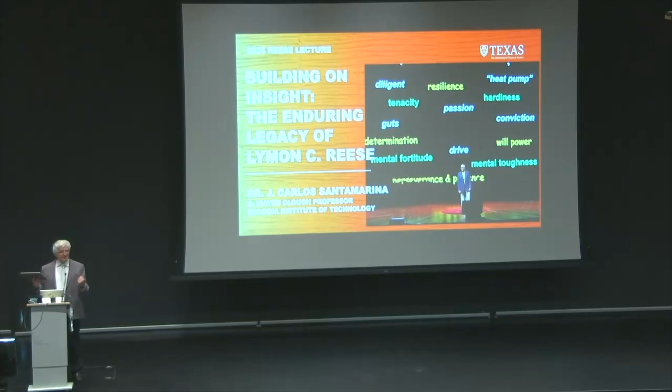I think his thesis was something like, some individuals excel so much with their grit, which, by the way, is not an easy term to translate. It's perseverance, but perseverance in the face of adversity. So it's a quite unique term. But his thesis was that some people have such exceptional grit that by sharing it with others, they catalyze the grit in the people who work with them.

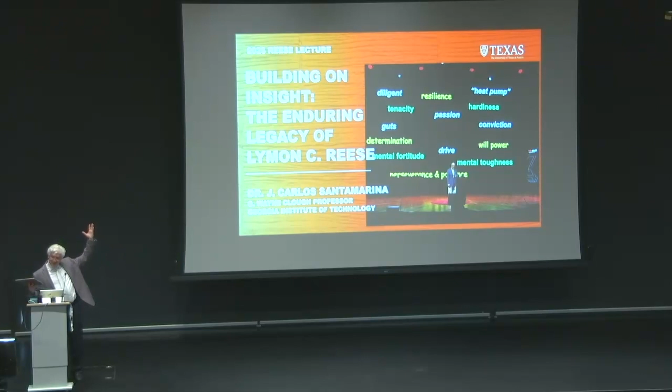And Professor Santamarina has touched so many people, including some people down there in 1984, back in the days in Cordoba. So it is wonderful that we will have now the opportunity to talk about the grit of Professor Santamarina, but with another person who has particularly exceptional grit, Dr. Lymon Reese. Carlos.

I have never had such a generous introduction. Sincerely, thank you so much. I'm very grateful, but I'm also, it's an honor to be here. I'm so touched by the opportunity to be here sharing this afternoon with you.

You know, I have come to realize that technical fields don't fade, don't die because we run out of fun questions. They fade because we stop asking questions that are relevant to society. And so from that point of view, Lymon Reese really addressed important questions, and he answered them, and he moved our field forward.

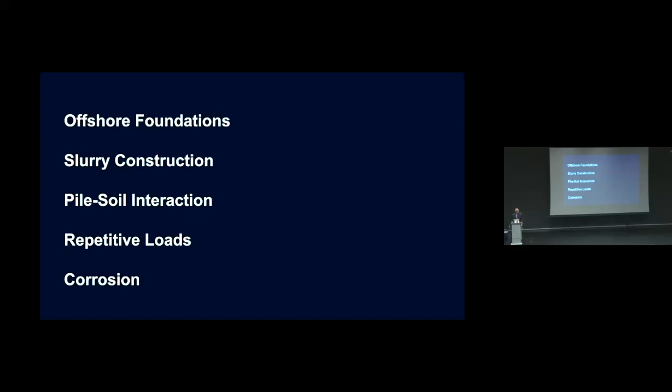So these are the contents. I will say something about offshore foundations, slurry construction that he really mastered, pile-soil interaction, repetitive loads, and I will say something about corrosion towards the end. So this is the first one, the offshore foundations.

This is really a seminal paper, his 1961 paper at the International Conference in Paris. Please take a look at that paper, it's really a wonderful one. There were simple solutions for the case where stiffness was constant with depth, but he recognized that was really not realistic. So he generalized the solution for cases where that was not the case, but he needed to use computers, and so he did.

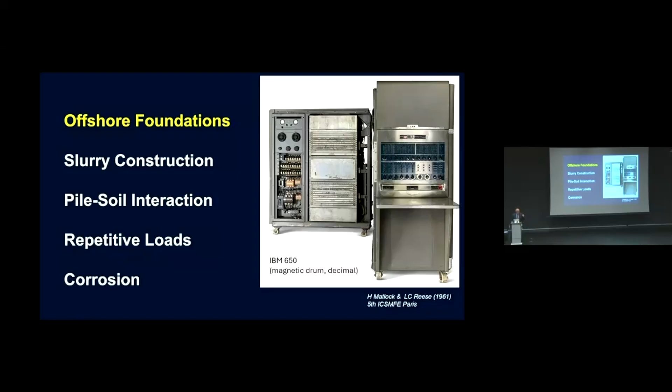He used this one, an IBM 650. It was a magnetic drum spinning at very high speed, and it had decimal notation — I think that was probably the only computer ever built like that. And that is the one he used. Because we didn't have access to those computers, he created all these nomograms, etc., that in industry are still being very useful.

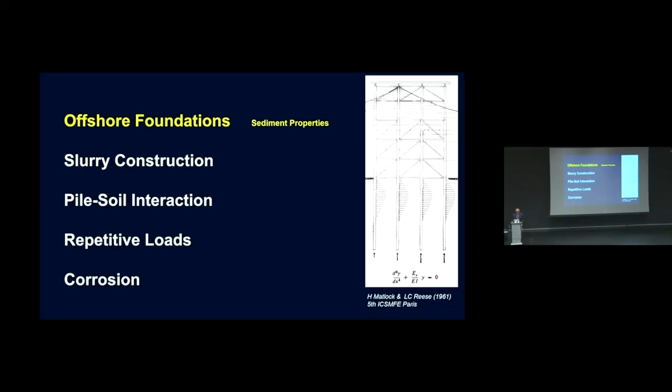I will take just a small topic in the offshore foundations, and I will talk about sediment properties. Coastal geotech is really a frontier for us in our community. Look, folks, 30%, 40% of the US population is in coastal areas. And by the way, that percentage is pretty much the same around the world.

Coastal is really a challenging space, and it's going to become more challenging with sea level rise and saltwater intrusion, etc. Imagine the cost to New Orleans, to Miami, to South Texas, to New York. I see Ed here, and he knows that firsthand. This will be huge in the years to come. We are talking about 30 more centimeters by 2050, and by the end of the century, probably a meter, plus or minus 20 centimeters.

These are big numbers. And the number of people that will be affected — Katrina was a 30-foot, 10-meter surge.

It's not the wind that caused the damage in Katrina. It was the water advancing and floating all the casinos offshore, making them come onshore.

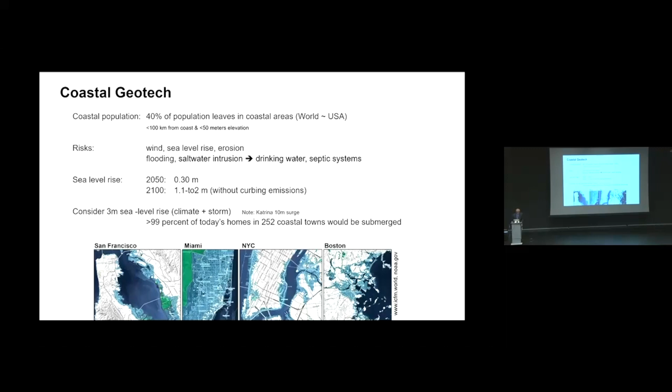But even with a much lower situation, with a sea level rise combined with a climate event of 3 meters, 10 feet, 99% of today's homes in 252 coastal towns will be submerged in the US. The cost of this will be dramatic, so we have to ask, what are the properties that we need?

And I like soil behavior, so that is where I'm hanging myself from Lymon Reese at this point.

But many of the sediments that reach the coastal areas and the offshore are indeed transported, like we have seen onshore. Look at the wind dust coming on the Red Sea, or the volcano blowing up in southern Chile, going all the way across Patagonia in Argentina, or the Amazon River forming a wonderful delta. These are terrigenous sediments that get transported and deposited.

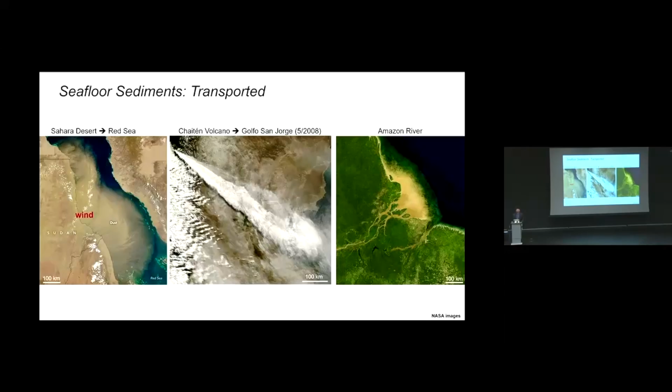But offshore, there are some unique formations that are interesting to recognize. First of all, there is lots of bioactivity: the diatoms, the foraminifera, and all the shells and the formation of the carbonates. These are going to give unique properties to our offshore materials.

And here is Billy, who was working on the sediments offshore North Carolina. And you think of Ariake clays in Japan and around the world. These are going to be very unique materials. Foraminifera and diatoms are the culprit in that case.

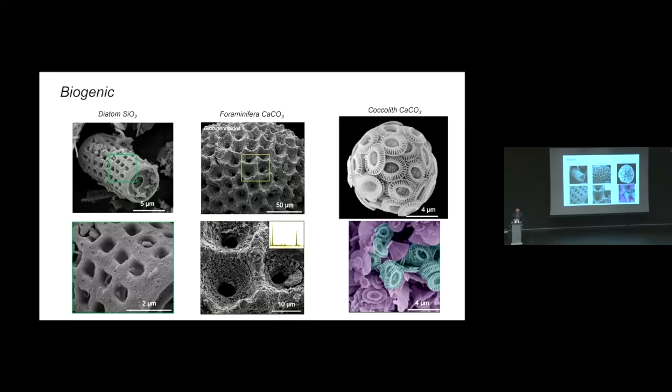But look at this one. Here we have the Gulf beginning to open, let's say 300 to 400 million years ago. Until that point, big deposits of salt had formed. But the salt is not pure salt, it's not like in the Great Salt Lake.

As it advances, this becomes a self-armoring layer, and it takes longer and longer for diffusion to take place. But all the salts that form the diapirs, etc., that trap the oil beneath or within in the Gulf of Mexico, this is the origin. These are unique sediments that you're going to encounter beneath the Mississippi sediments.

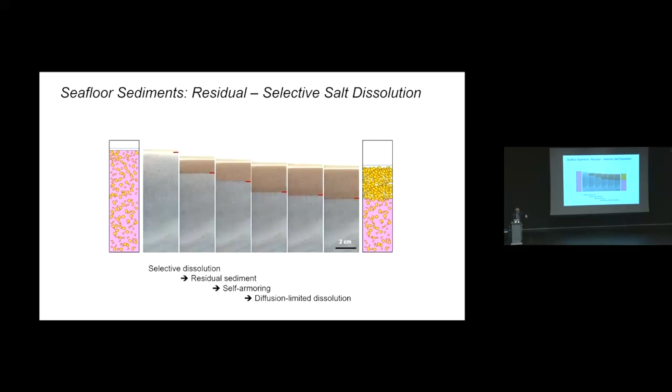Now, in many cases there are hydrothermal vents, and now we are talking about supercritical water if you're in the deep geothermal. Supercritical water has the ability to dissolve the silts and the silicas, and then they come and precipitate in the water column. The weirdest sediments begin forming. And if you thought that Mexico City soils are weird, these are an order of magnitude weirder, with properties that are really out of scale.

But regardless of the formation history, we need to recognize that if we're going to move into the offshore coastal regions, some of the things we have learned in our community throughout the last century still remain. Grain size distribution is critical. The partition between coarse and fines is critical. Please don't use the words cohesive and cohesionless, that's sinful. So the distinction between coarse and fine, that is critical.

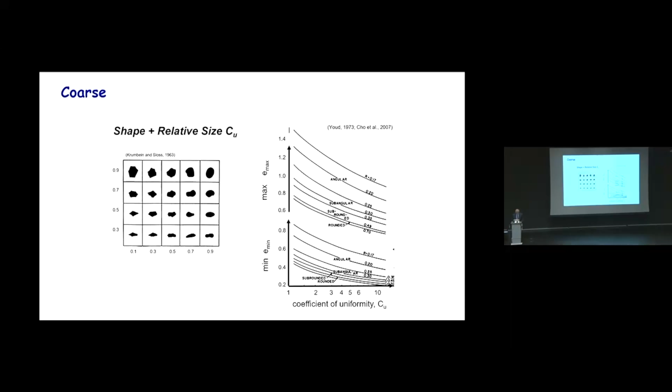For the coarse material, it's about grain size distribution and particle shape. For the fines, it's all about how it reacts with the pore fluids. What happens if there is a brine front, or a low concentration front, and saltwater intrusion? If you run three liquid limits, with brine, with deionized water, and with kerosene or decane, you will gain an amazing amount of information about the behavior of the fines. It could also affect things if you have a sewer leakage, etc. This is a very good way to test it.

By the time you bring them all together, it's all about whether there are enough fines to fill in the voids in the coarse material, and whether it will be coarse-controlled, with the fines plugging the holes while the skeleton remains coarse-controlled. I think this is a very smart pointer. Let me see.

In this case, the fines are plugging the holes. Stiffness and strength are controlled by the coarse, but the fines are controlling permeability. It's changed six orders of magnitude by now. And by then, the coarse are beginning to float in the fines, and it becomes fines controlled.

This is the essence of soil classification. There are a few upgrades to the unified soil classification—please take a look. We're doing much better today, 100 years, or 60 years after Casagrande, 80 years after Casagrande.

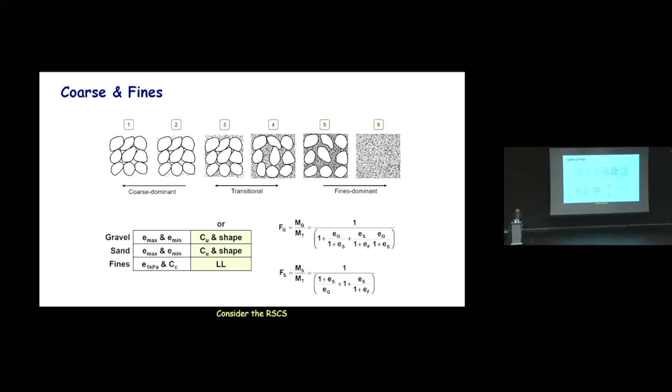Now something interesting happens when it's offshore. The sediments form, and there's no capillary action—everything is about burial and self-weight. So the question is, how loose could they pack? If it's a sand, it's going to be somewhere between Emax and Emin. But as it gets finer and finer, the void ratio gets very large.

Those hydrothermal precipitates I was talking about have a void ratio approaching 100, and they are stable—99% of it is water. It's not too far away from Mexico City, where it's 90% water, but in this case 99%, and they are stable. We totally miss them when we put in a piston sampler—it just goes through, so that's not a way to study them.

So this is what we call the asymptotic void ratio at zero effective stress. It does exist—there is an asymptote. Now I can use those asymptotic void ratios to estimate the pore size distribution and see, if there was an interface and it gets drying, how much suction it could mobilize.

For a sand, not too much—that's 4 centimeters of water head. But as you go into finer materials, like a kaolin, somewhere around 10 meters squared per gram, you're already at 200 kilopascals, which is 20 meters of water in terms of suction. So that soil is beginning to get squeezed.

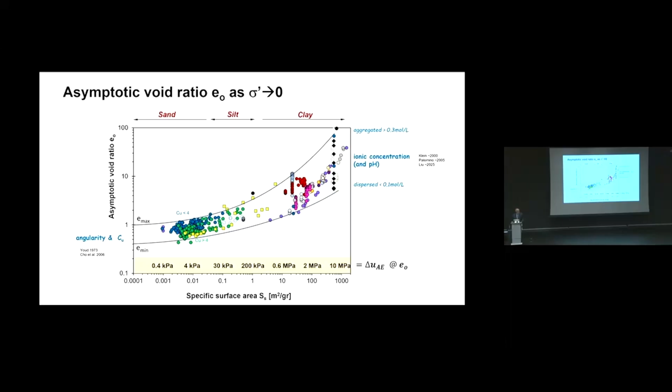But there are normally consolidated soils offshore. Of course, diagenesis kicks in. So now that we recognize there's no suction, what is the evolution of self-burial, the evolution of effective stress? As it begins piling up on top of each other, it squeezes the lower layers. So how does effective stress, stiffness, shear wave velocity evolve?

I put a few slides here for Ken's talk. It's a pity that he isn't here, but we'll send it to him.

There's very little mathematics here, but the increase in effective stress across a layer is the weight of that layer—the buoyant weight of that layer—which is related to the void ratio, and the void ratio is related to the effective stress. A classical differential equation. But to solve it, we need to know how the void ratio changes with effective stress.

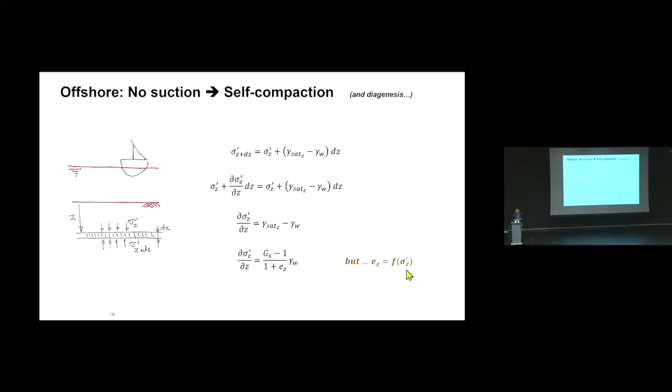And my goodness, we've been using Terzaghi too much. Nothing is linear—it's just linear in a narrow range. You can fit a linear thing to anything, right? But it's not. This is the true behavior of soils, folks. It's an exponential decay—it looks almost like Boyle and Mariotte's law when you squeeze a gas. We're just squeezing particles, but that's the true behavior.

Of course, when you put it in semi-log scale, it looks different, and then we begin fitting with one line, two lines, three lines for unloading. But that's not real—this is real, and this is more or less the true behavior of a soil. If it has some cementation, it changes a little, but the effect isn't so pronounced. This is the true behavior.

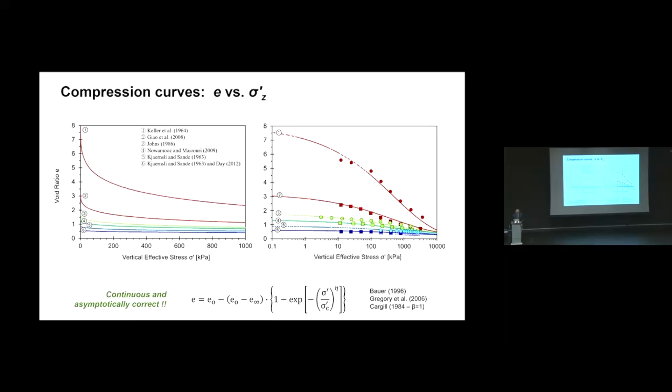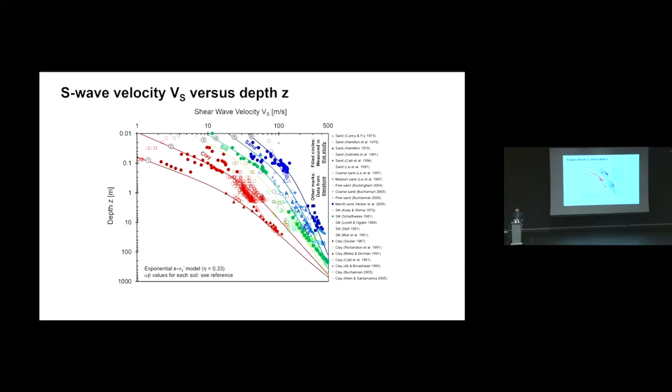And if I know the shear wave velocity, and I know the bulk modulus of water, then this is a simple equation, it's called Biot-Gassmann. I can predict the P wave velocity, and I get the P wave velocities quite well, which means something very interesting.

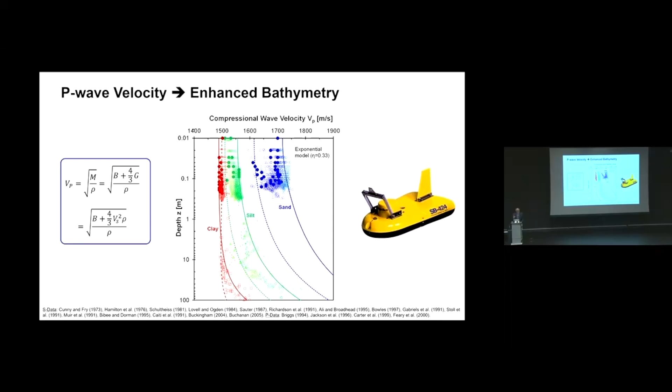Now I can take a sub-bottom profiler, or I can analyze marine seismics, and from the data I can begin predicting what soil types I have. And then from there, you move through the whole sequence of events. So it's a very powerful way of characterizing our offshore sediments.

Now, the story, as we move forward, will need the hydraulic conductivity, so I'm going to say something about hydraulic conductivity. At the beginning, I said void ratio is quite irrelevant - that is a very bad thought. It is a secondary parameter, or porosity, but it is an important one.

This is sand, high permeability, low range in void ratios, but as we move into the silts and clays, this is a bentonite, we see that the permeability is quite related to porosity. And if I look at the intersection at void ratio 1, that permeability is directly related to the specific surface.

Specific surface is a very good parameter to measure, and it's very easy. So if you ever order somebody to do a liquid limit, you have to request that they do a specific surface too, because it's very informative. And so now we know how compressibility works, how permeability evolves, and we will be able to do a few things.

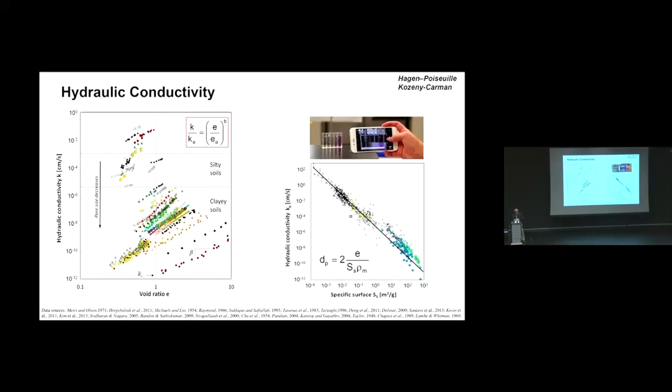But this is, once again, going back to Ken Stokoe: it is great to recover sediments and to measure the velocity, but the problem is that recovering sediments is quite a tortuous experience for the sediment. All the state of stress gets released, altered.

And if you are offshore, when there is high pressure in the water, gases are in solution, and when you bring them up, it's like opening a Coca-Cola can - all the bubbles come out. And now you have chocolate mousse, you don't have a sediment anymore. So what can you infer from that? That gets very tricky.

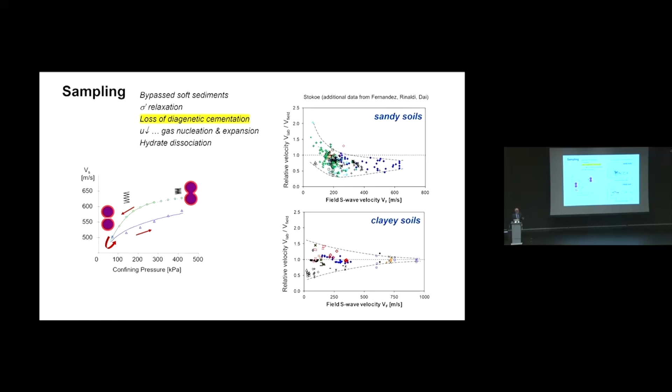But this is data primarily from Ken on the effect of the shear wave velocity that you measure in the lab compared to the field for sandy soils and clay soils. Yes, there is pronounced disturbance, so we have to handle that data carefully.

And so we want to measure in situ, but let's say that we want to measure with a cone. Now think at 1,000 meters of water, you have 10 megapascals of pressure. Think of that pressure pushing the cone - you're not going to measure the soft sediments. This is controlled by that huge force.

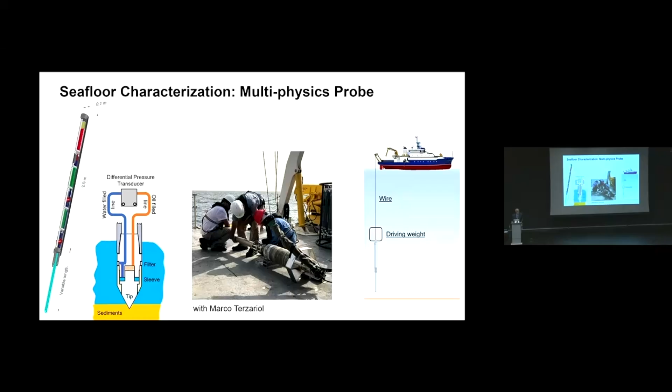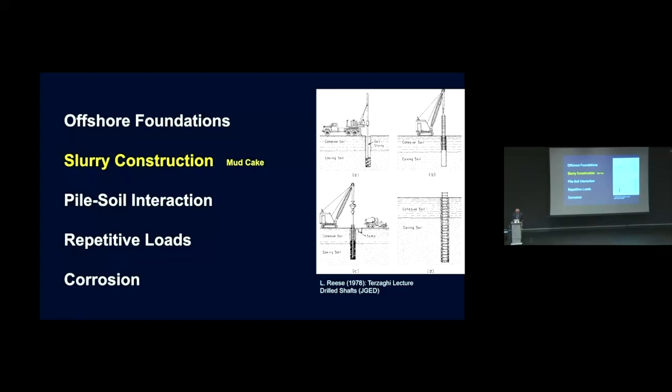But there are differences - those soils have not been exposed to capillary action. Let's talk about slurry construction. Lymon Reese is the one who really pushed the boundary on that. This is coming from his Terzaghi lecture, that sketch on drill shafts. And he gave us wonderful guidelines and recommendations.

He identified three problems. One is that the yield strength of the slurry increases with time - this is thixotropy. The second one is that as that slurry pushes against the boundaries to hold the borehole open, the water goes through, the grains remain, so there is filtration taking place, and this is going to form a cake.

The third issue is that some of the slurry may penetrate the formation and alter its properties. For drill shafts, this isn't important—insignificant for load transfer—but for other applications, including stone columns or oil production, this is critical. So let's explore this a little bit.

If you keep reading the manual—this is from the O'Neill and Reese manual—there are lots of wonderful jewels of recommendation. One of them: they keep insisting on 4 hours. If you're going to wait more than 4 hours, you have to agitate the mud. And if the mud is thicker than 2.5 millimeters, you have to go back and re-ream the excavation before you place the concrete. Wonderful explanations, but I wonder where they got the numbers from.

These are very empirically driven. Let's see if we can make sense of them.

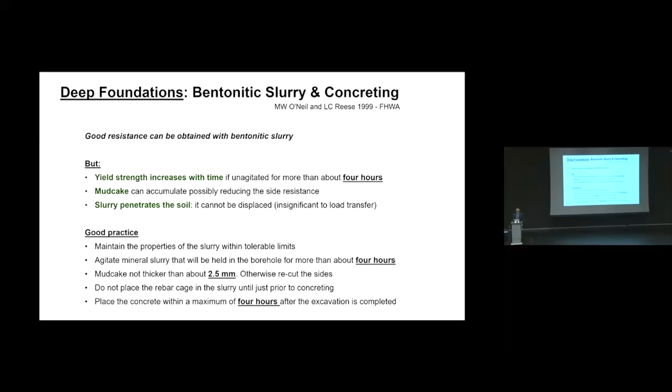This is the model I would like you to have in mind. On one hand you have the slurry. This is the formation—let's say a sandy formation—these holes, these grains. This is where some of the mud invades at the beginning, and the cake forms. That cake is critical. That's the one that holds the borehole open.

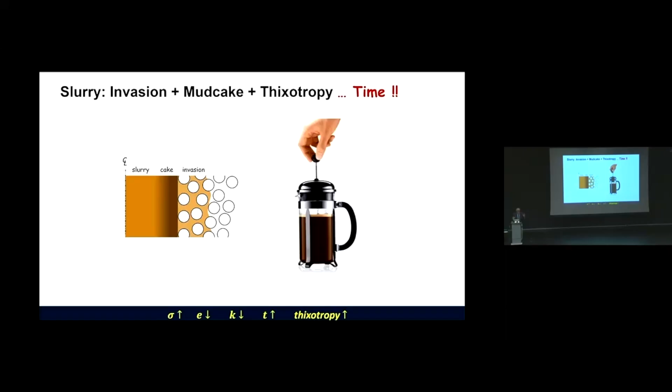That is the same as a French press. You have all the grains floating in suspension, and you begin pushing, and now the boundary is moving. In this case, we'd like to think of the borehole wall as static, but it's exactly the same. So next time you make coffee, get inspired—there is something there.

For small changes, well, we assume something, right? But when things change so much, as during the mud cake formation, we can't, and we have to take a more comprehensive look.

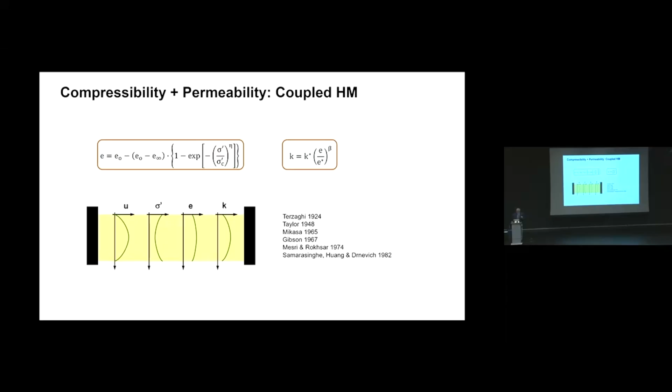By the way, we heard from Drnevich yesterday—this is a wonderful sequence. There was a paper there. Mesri got involved. There were lovely discussions. I haven't figured it out. I'm sure Gibson was involved too on this one. But anyway, this is where I would like to continue this story.

Remember the Macondo well. The Macondo well was an amazing drilling experiment. They were in 1,500 meters of water—probably you're more used to feet, so multiply by 3, about 4,500 feet of water. And then they went down about 4,000 meters into the sediment. This was a deep well in the Gulf of Mexico, using a rig built in South Korea, the beautiful Deepwater Horizon, worth $1 billion. It was pretty new.

Doing this hole was probably like a $200 million test, and it blew up. The environmental consequences were quite pronounced, as you may remember, and the economic consequences for BP were terrible—probably at least $100 billion at the end.

What happened? It was all about mud formation, the cake, and its displacement by the cement grout, the same way we do in tremie operations, but now happening in a borehole at great depth. We would like to explore that a little bit better.

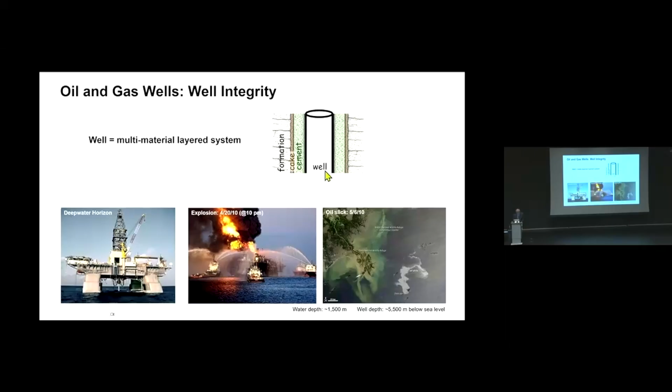So we take the equations mentioned before—remember the compression equation of sediments and the permeability as a power function. We curve fit the data to the extent it's available. That gives the void ratio at zero effective stress that we were talking about. Now, with a Lagrangian formulation, etc., I begin predicting how this is going to drain and squeeze itself and form the cake.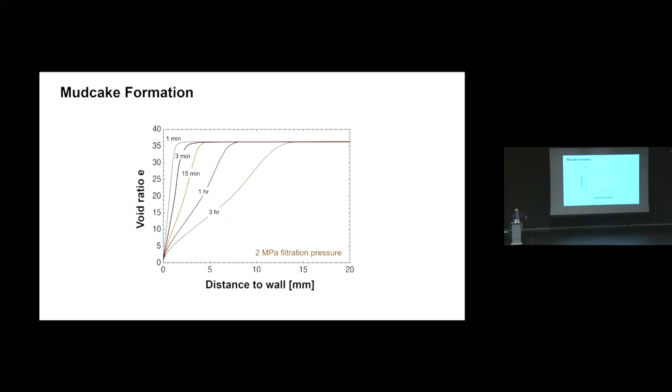And so that is the evolution of the cake. In the meantime, and this is data from Shadi, because of thixotropy, the viscosity is increasing. And if we use more or less this power function to fit their data, within 4 hours the yield stress of the slurry has increased by probably 3 times. So it gets thicker. So you do need to re-agitate the formation.

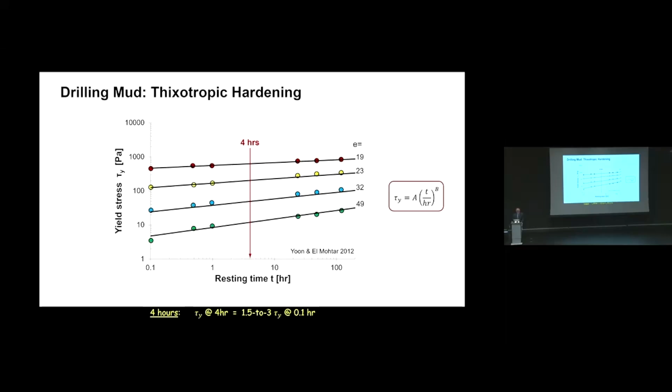Now, when we put all that together, you have to think, will the grout, the cement, the concrete that you're placing in the tremie operation, or the grout in the borehole, be able to displace the cake and the mud? And now you can think of the yield stress, or let's say 0.2 sigma prime from Mohr-Coulomb, and this one is from the test by Shadi, and then you can see what you will be able to displace or not, but you will leave cake behind.

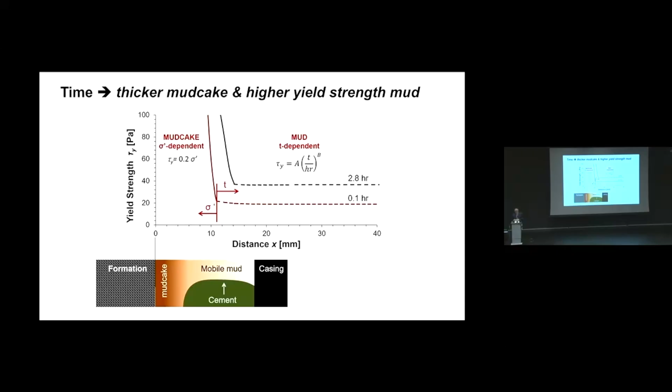And the question is, how will that react with the cement? The cement will contract, and the cake will take some of the excess calcium ions and contract further, and are you going to have a path for gas to make a gas bubble that will reach the drill rig at the top, in this case?

And by the way, with respect to invasion, and Shadi, there is your data too, another data set. We've run several tests here with syringes and with oedometers, how far it invades, and in general, the depth of invasion related to D10, which controls the pore size, is directly related to the pressure that you apply with respect to the yield stress by a factor of 0.1, 0.6, somewhere there.

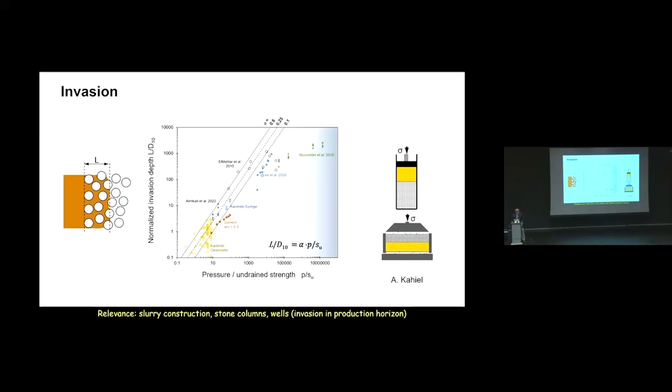This is a very complex phenomenon because as the slurry is invading, it's draining out the water and its strength is increasing. So we think that we know the strength of the slurry, but that's not the front that is invading. So it gets very complex. As you can see, the data has plus or minus half an order of magnitude uncertainty.

Pile-soil interaction. This comes from Lymon Reese's amazing Federal Highway book, but from the Casagrande lecture, one thing I didn't fully appreciate before I started preparing for this talk is that he did part of the contributions for the p-y curves, the laterally loaded ones that probably we are more familiar with, but he also did it for the q-z, in other words, the vertical axially loaded piles. And I will come back to that, and these are the classical sketches of pile-soil interaction.

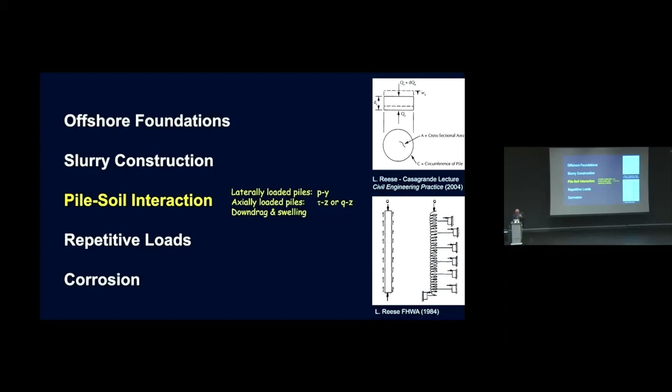So look at this. This comes actually from the paper with Seed. The paper actually is in 1955, but it appears to be published twice, again in '57. So you see that little uncertainty there, but this is the data that they had in the paper. Look at the quality of that data. It's in the Bay Mud. All these points are from strain gauges.

They open the steel pipe, they glue the strain gauges, and they put it back together, and they push it. The data is exceptional. And then they did a mathematical formulation, and you have the classical formulation for the tau-z or q-z curves.

And by the way, one more detail. If you look at the acknowledgements in the paper, they acknowledge Carl Monismith and Ray Clough. Carl Monismith, famous in the pavement discipline, he's the one who went on to the mechanistic design of pavements. Finally, we moved out of CBR, but not everywhere. And Ray Clough is not our Wayne Clough. This Ray Clough is the one who invented finite elements. What a time at Berkeley.

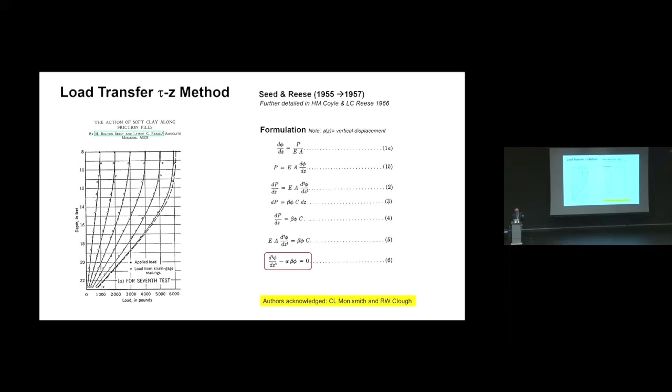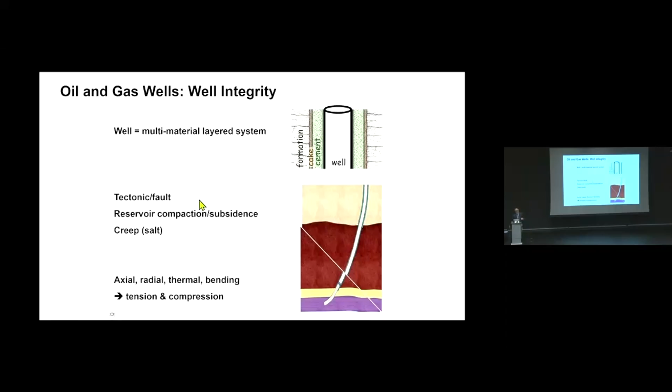What an amazing time. So now I go back to use his formulation for problems of wells, because I really think that energy geotech has amazing opportunities for our community. And not only do we have that multi-material, multi-layer system, we also have all the axial loads that go on the pile, and the shear loads and thermal loads, etc. I will give some examples.

So this is a case at Nankai Trough production, where they were trying to produce gas from methane hydrates. This is like 2,000 meters of water, and the hydrates were 160 meters below the sediment level, and so they put a well, and they began depressurizing to produce the methane. Within a day or two, the whole thing clogged and then collapsed, and they couldn't understand why. So here we try Reese's q-z curves.

And you begin doing pile-soil interaction, recognizing now this is not downdrag, it's not the sediment consolidating at the top, this is the sediment consolidating beneath the pile or at the lower level of the pile. So this layer will squeeze, and now instead of downdrag, you have the whole well hanging from the sediment above. And it is all dependent on how stiff the lower level will be, how much is the peak load that will be mobilized. So this is what this plot tells you.

So then we wanted more degrees of freedom, so we moved on to finite elements to control the situation better, and we got the same thing, but with more details. And so look at this. This is in tension. But I don't think that it failed in tension. I think that this is the yield capacity of the well. I think that we just longitudinally buckled the pile, but furthermore, in the lower part, you have what are called the screens to hold the sand from coming in and to be able to withdraw the gas, and I think that they just crushed the heck out of it.

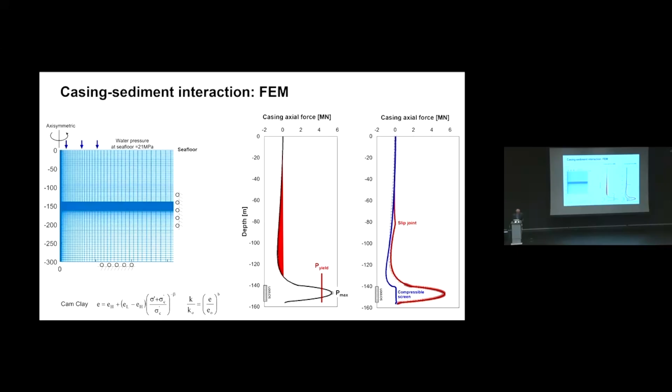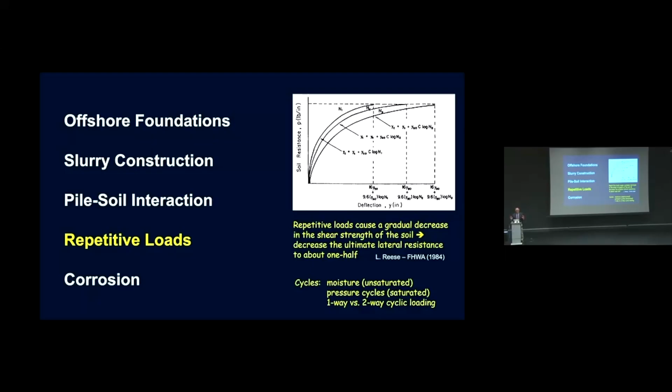The next one is that in several parts of his publications, they highlight the importance of repetitive loads. Repetitive lateral loads, and in his quote of a classical paper by Broms, repetitive lateral loads gradually decrease the lateral resistance. But he also talks about cycles in moisture, cycles in pressure, and he made beautiful distinctions between one-way versus two-way action in cyclic load. So in cyclic load, you could put compression and tension, let's say the external piles of a building, but you could only go down and come back to a neutral value and come down, and it gives you completely different behavior, beautifully recognized by Reese.

And so, building on that, these are some of the caissons, and these are laterally loaded piles, and you think of how element A and B are being loaded and moving towards and away from the failure line. What happens if it is vertically, experiencing primarily shear? What happens if the pore pressure is going up and down? And at the tip, or a shallow foundation, moving close to a K-naught line or something of that kind. All these systems are going to give us different accumulation of deformations. Typically in our literature, we tend to think that the first cycles matter. Look at your driveway and how much it cracks, and you know that it's more than a few cycles. And so things keep accumulating way beyond a few cycles.

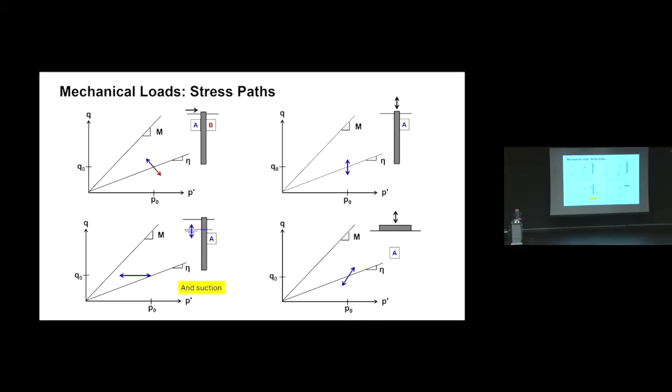And yesterday we were talking, and Ricardo Dobry was sending us a video, and Ricardo talked about the elastic and volumetric threshold strain, beautiful work from the 80s. We can continue accumulating deformations beyond Vucetic and Dobry's threshold strain. And we have to wonder how could that be possible. But that is the challenge of repetitive loads.

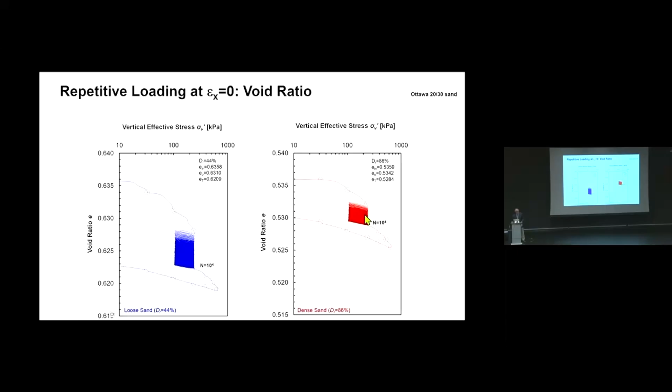And so take a look at the sand. We tend to think of sands as very stiff, but you can put sand in an oedometer and measure, and you go up and down, and you begin accumulating. This is 10,000 cycles. You begin accumulating quite a lot of deformation, and this is for a loose sand. For a denser sand, this 86% relative density, you still have significant accumulation. And if I stretch it in time, I see that they are all approaching some asymptotic value. There is a terminal void ratio, and that reminds me of the Casagrande type of thoughts. There is a terminal void ratio for repetitive load, and nothing to do with liquefaction.

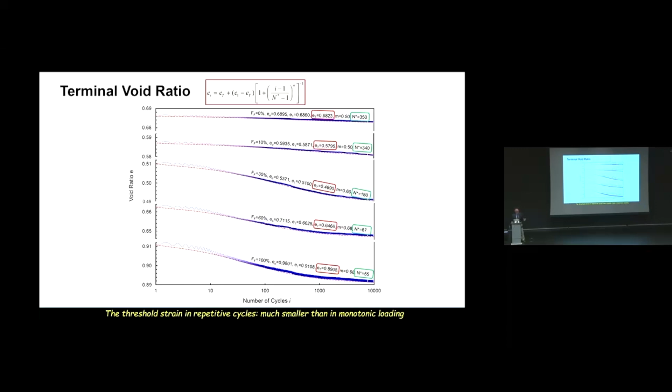And in fact, you can fit it with this equation. It fits very well, as you can see the red line. And when you go to i equal infinite, it gives you the terminal void ratio as a fitting parameter. So it's very robust, and under zero lateral strain, or under pure volumetric strain, there is a terminal void ratio. But what happens in shear?

Well, this is now in a simple shear device, and we apply a certain static shear and then an oscillating shear, and we want to see, is it going to continue shearing? We already know that the volume will go to an asymptote, but what will happen with the shear accumulation? In this case, the static shear gives you the idea that you are on a slope, for example.

Wonderful cases by Ron Scott. So if the amount of shear is not too much, and this doesn't mean anything, everything is relative, but you're far away from failure, it goes to an asymptote. But when the amount of shear is more pronounced, now you have a monotonic static shear of 150, you add 50, you're bringing it close to the Coulomb failure.

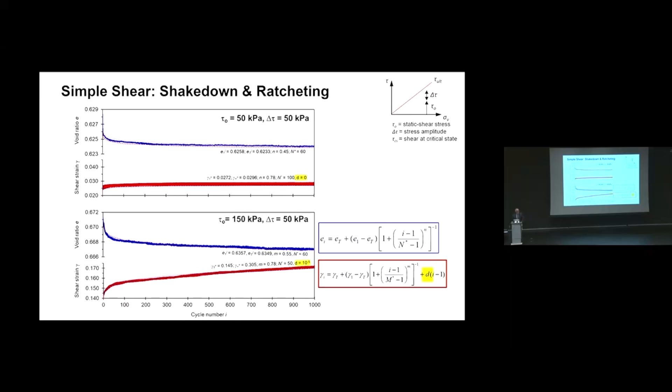Now you continuously accumulate shear. It doesn't go to an asymptote. Shear keeps accumulating, that's called ratcheting. And so this is the concept of ratchet coming from Leonardo, the idea of a ratchet, and that is what we are doing to soils. Now, for peace of mind, let me tell you something. If you are not close to failure, probably ratcheting is not going to be a problem for you.

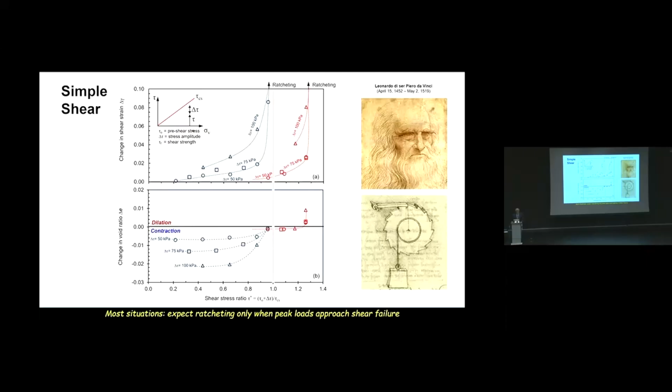But if you are close to failure, and imagine this is the failure, this is normalized by the failure load. By the time you are approaching 80% of the failure load, you really have to begin thinking carefully about the possibility of shear accumulation. We handle monotonic loading very well, and I'm telling you, we better begin paying more attention to repetitive loads. They are multiphysics of all kinds, and they are affecting the long-term performance of our infrastructure.

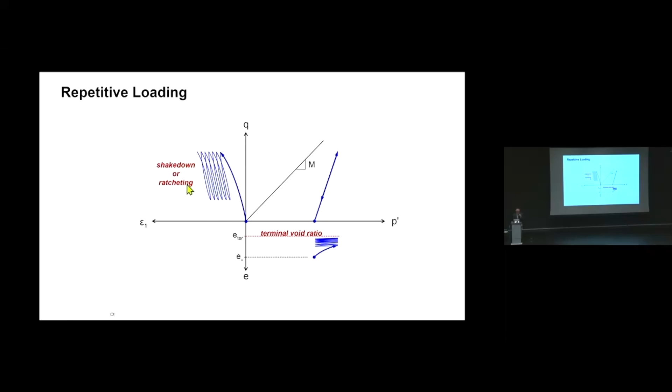So from the point of view of, this is a four-dimensional plot. This is tau sigma, and this is sigma void ratio, and this is the deviatoric strain. So from the point of view of void ratio, it will go to an asymptotic value, it cannot vanish. But from the point of view of shear, it can continue accumulating if the peak is close to the failure mode.

Now, we are beginning to use our deep foundations as heat exchangers for what we call thermally active piles. There are codes in Europe to do that, and it's not totally catching up in the country. Some universities have demo experiments, but I think we're going to move in that direction a little bit more. And so let's do an experiment here.

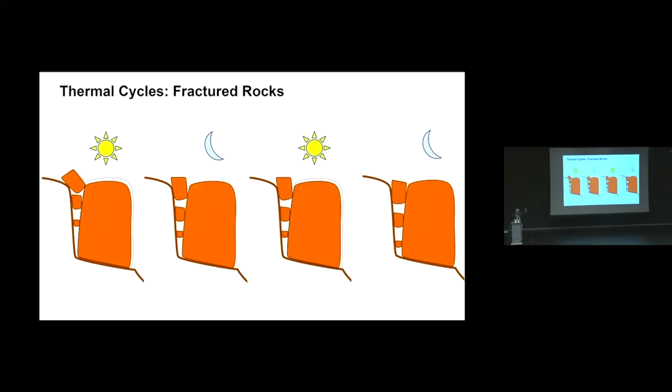Imagine this rock block that gets heated up, so it expands. Then when it gets cold, it contracts, but it doesn't really contract from the back, it contracts on the front. So the chock blocks fall further down, it heats again, expands further, and then the chock blocks go down again. Now we have a thermomechanical ratcheting in our retaining walls, in our walls, in our exposed rock masses. And you begin to see them.

I'm going to use this pointer, it's amazing. Look, you see that wedge? When the upper wedge heats up, it's going to push. This is not Dick Goodman's toppling. This is thermomechanical ratcheting. This is going to move forwards. The good news is that for the heat to penetrate, to have this effect, it's a diffusion process and it takes time. So it won't happen with cold and hot during the day. It does happen with seasonal cycles.

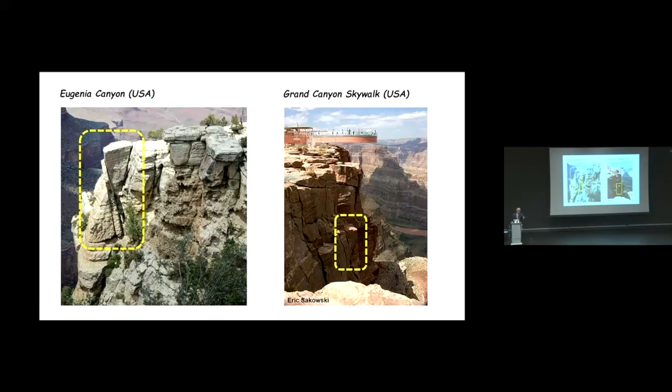Take a look at that one. Where is the other one? Let's see. There is the other one. That block is also under the port there in Grand Canyon. This is going to move out. And now I'm paranoid. I go to the mountains and I'm looking for those wedges and I find them everywhere. So keep an eye on that. Please send me pictures. I have a collection. Please do.

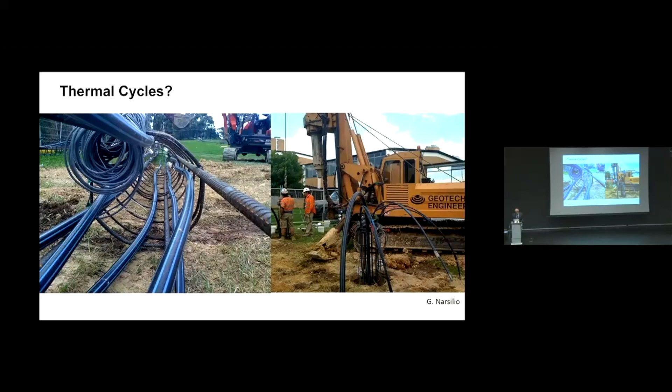So let's go back to Lymon Reese. It's a pile. Now we put tubing inside to circulate water so we can store the heat in the summer and pull it back in the winter. And what will it do to the pile? So let's take Reese's QZ method. You write the formulas and you satisfy equilibrium, compatibility, and all that, and you begin moving things around.

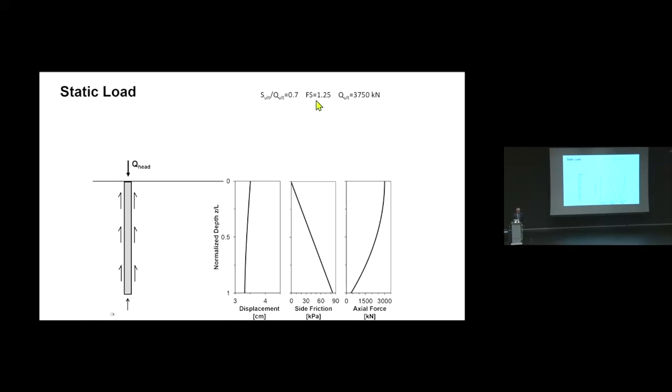This is what the static load is. Before you get scared, this is a fairly extreme case. This is primarily shaft resistant. The shaft carries 70% of the total load, with a factor of safety of 1.25. You know that is not good. You're too close. And so you begin doing it, and now you change the pile-soil interaction, because when you heat the pile, it's going to expand.

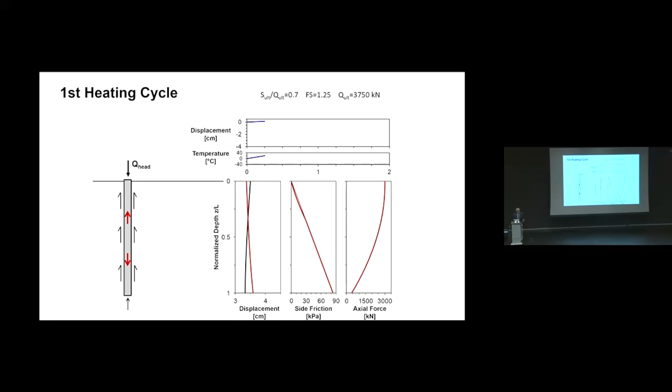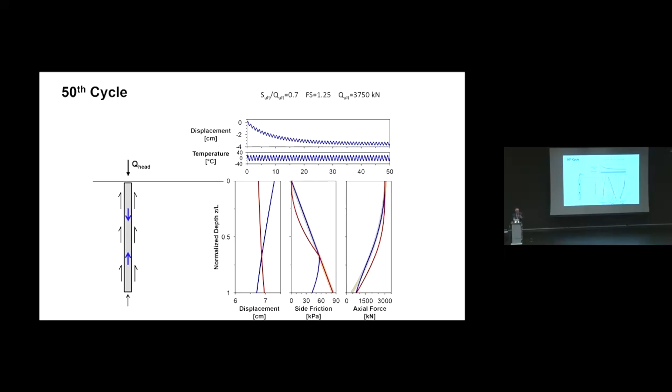To aggravate the situation a little bit more, this doesn't consider what happens with the behavior of the soil during heating and cooling. Go back to Mitchell and Campanella and thermomechanical consolidation, etc. So it may get a little bit more complex, but I think that we're overall on the safe side, but there will be deformations involved.

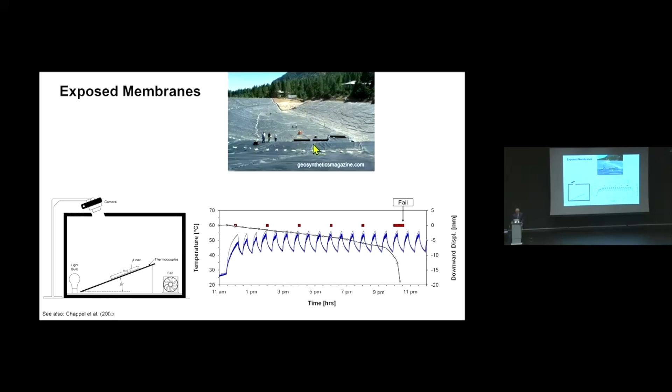This is for Jorge Zornberg. Jorge, these wrinkles of this exposed membrane are because of thermomechanical ratcheting. And by the way, we did the experiment. This is experimental data.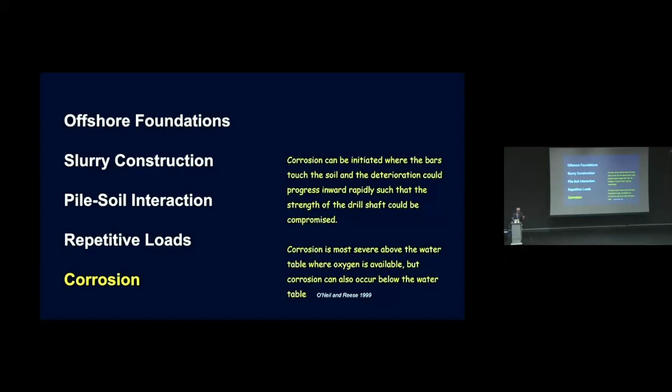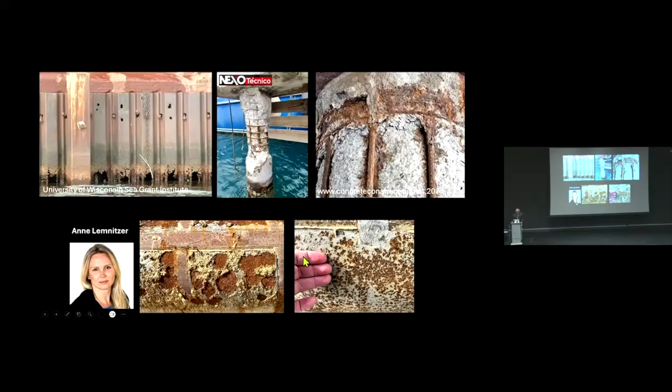A few more thoughts, and this is on corrosion. O'Neil and Reese made many points about corrosion, particularly for reinforced cases with a cage. So let's take a look. There is plenty of evidence of corrosion. I was visiting Anne Lemnitzer recently, and she had exhumed some steel piles that she had there - if you haven't seen her work, it's beautiful, please take a look. Looking at it, there were quite significant amounts of corrosion, so I decided to put something on corrosion in this presentation.

Corrosion is a big problem. It's about 3-4% of the GDP. That's a big problem. And globally, it's $2.5 trillion a year. And a significant value, according to their association, is preventable with existing technologies.

By the way, we had lots of projects on this from Aramco. If you have been following the news, Aramco has a big pipeline that goes from Jubail to Yanbu, crossing the kingdom, trying to get the oil out now, avoiding the Strait of Hormuz. Well, we did lots of work on that pipeline. They have similar numbers, $900 million a year, the cost of corrosion, 25% preventable, but the deferred production costs every time they have a failure is 50 times greater. This is a costly problem.

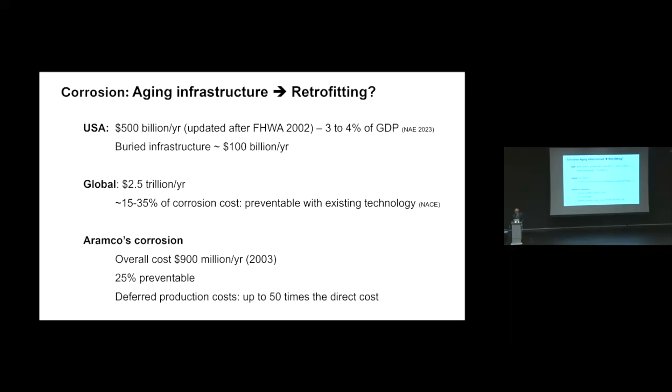Alexandra, this is you. So let's take a few examples.

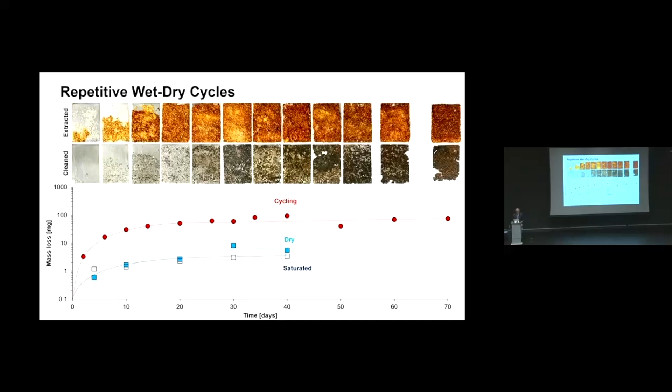Lymon Reese really brought together understanding and experience. He pioneered the algorithms for analysis. Really so impressive — his 1957 paper, his 1961 paper, truly impressive, marked the field.

I wonder, what would he be working on today? I should have asked ChatGPT, but I didn't. But what would he be working on today? And I don't know.

From the technical point of view, coastal work is really a rich space for us. Just keep an eye on how the sediments form — don't just transport onshore to offshore, there's a different formation history. Slurry construction, the mud cake formation and the thixotropy, critical for well completion and drilling. Soil-pile interaction — we also saw how important it was, and it's not only the downdrag, there's also swelling effects, in this case putting the well in tension. Repetitive loads...

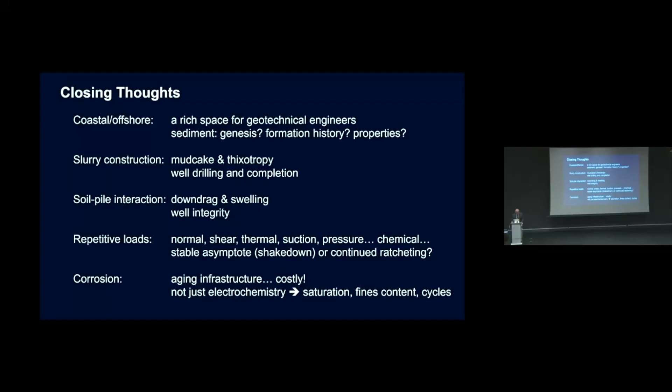We have built so much in the time of Lymon Reese, and so much to maintain and retrofit with huge corrosion issues. This has been the work of so many people, and I just put a few names here. If you are interested about the source, we are trying to put some videos on the computer. But above all, I'm so grateful to all of you, and to Jorge, and to the inspiration of Lymon Reese. Thank you.